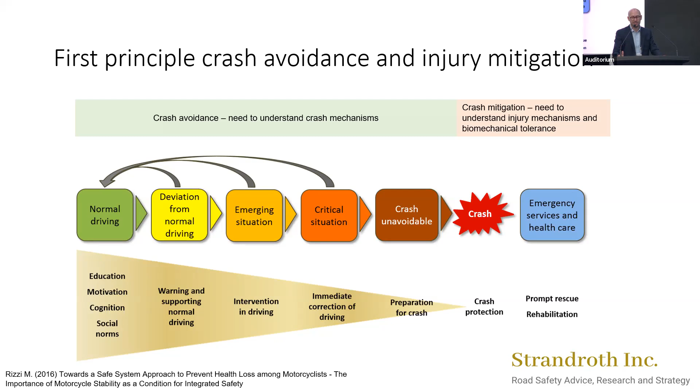Now with the safe system approach or Vision Zero, that started to change quite a bit, where we say that, yeah, the road user definitely has an important part in the safe system. But when it comes to the ultimate responsibility for crash mitigation principles and making sure the system is forgiving when people make mistakes, that's where we as system designers and infrastructure designers need to step in and make sure that system is forgiving.

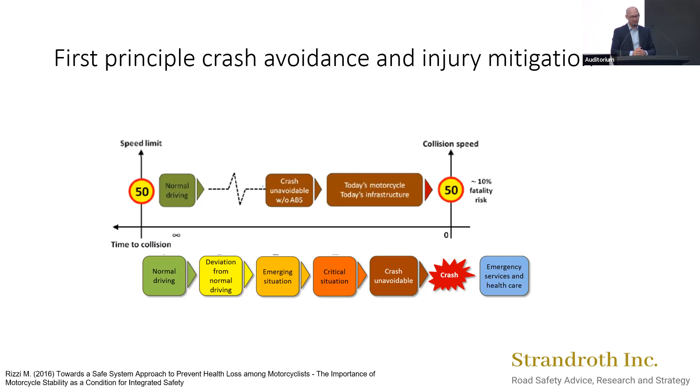The next thing is to look not only at crash mitigation but crash avoidance as well, and there are still question marks there because there's been a lack of understanding on how to work with crash avoidance for motorcycle safety regarding infrastructure and vehicles. But that's changing, and over at least the last decade there's been a lot of technology in development and some already implemented - ABS is a perfect example, acting in the crash avoidance phase, making sure instability in braking is avoided and thereby avoiding the crash.

What we want to know is what kind of impact this would have on fatalities and injuries. This is where we get into counterfactual analysis, a tool to help us understand the effect of different types of treatments, because that's really what we need to know.

If we're getting into a strategy development phase or an action plan and we want to do a set of measures for motorcyclists to improve safety, we want to understand: if I do this, what is the impact, what is the number of saved lives I can get from that, and the number of prevented serious injuries.

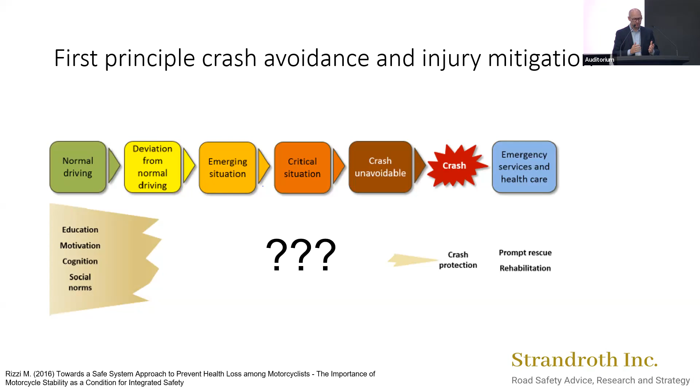So if we take the next slide, that was one of the examples that happened when I was part of authoring the first evaluation of ABS in Europe. And that's where we used counterfactual analysis to understand what a system or a treatment is actually targeting. What is it trying to do?

And if we look at ABS, for example, on the left-hand side of the previous slide—that one, thank you—the first thing is to understand what ABS does. Well, it acts under braking. So you start to make up a decision tree and look at all your fatalities and say, how many of these fatalities actually have braking involved? And if there's a no, of course, ABS would have no effect. But if there is braking, then ABS could potentially help.

And then you continue on that decision tree and make more advanced boundary conditions around a certain system. You end up, in this case, with the fact that two-thirds of all fatal crashes with motorcycles had braking involved, and also instability in braking, which means you get an idea of how huge the effect could be in a system like this. But that's only one example, and that spurred the hypothesis for a statistical study that then evaluated real-life benefit to be around 50% for severe and fatal injuries.

So that's only one system, but that could be done for several systems. If we take the next slide, we can see the result of that counterfactual analysis being done on several treatments in a country like Sweden.

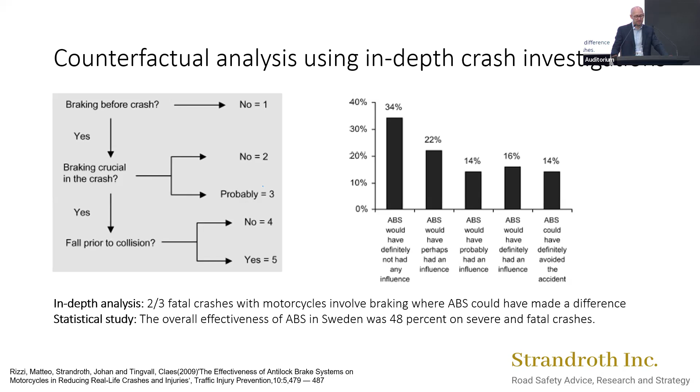So the blue bars here represent the number of saved lives for different types of vehicle safety measures. The green ones would be different types of infrastructure measures, and the yellow ones would be different types of road user behavior treatments or measures.

And it's not a full-blown evaluation where we wait 10 years for crash data and then see real-life benefits. What it is, is a what-if scenario to say: we know that there's a certain system that acts on this type of crashes. What if we would do something about that? What if we would introduce this treatment? How far would that take us? What's the individual benefit of doing things?

And that's an important tool when we try to prioritize and choose, in my country, what the specific benefits are. That's an important factor. This is Sweden, and this will, of course, be quite different in other parts of the world.

Now, the laws of physics are the same. We as humans, what we tolerate in biomechanical forces—that's the same. But the number of target population crashes differs from different regions of the world. And that's why this needs to be done and repeated in different parts of the world.

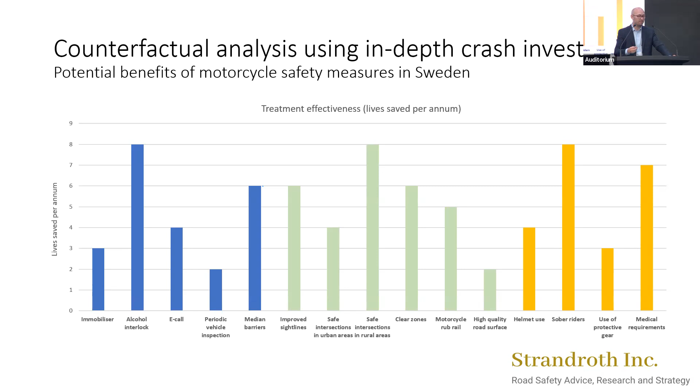Now, if you choose an action plan or a program, of course, you need to prioritize. So maybe the next step, if you take the next slide, is an example of how you choose some of those things to say: here are my most important key elements in my action plan to reduce a target, or to reduce the number of fatalities and injuries to a specific target.

And then I can calculate, through my analysis, the effect of that in terms of number of saved lives, and I can add that and account for double counting so that I actually get a combined effect of all this treatment from a holistic perspective—an understanding of how close that will take me to the target. So in that sense, it's a more holistic, strategic response to the whole problem, where I want to make sure I have different types of elements and different types of pillars in my response.

If I can provoke a bit, we probably want to be a bit more visionary than that. This is very important when we look at interim targets, with recommendations from OECD, WHO and others for targets to be ambitious but also empirically derived and reasonable, so I have an evidence base to achieve them. But if we look forward and ask how an end state would actually look - what does a system look like with no fatalities or injuries for motorcyclists, and do we have the tools today to get close to that? How would that look, and can I validate it with in-depth crash analysis?

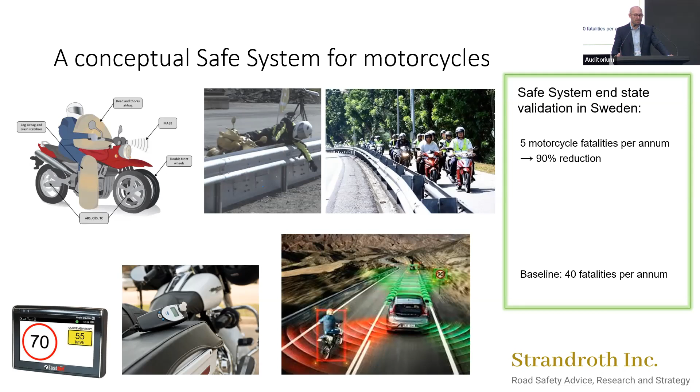Finally, I want to acknowledge that this differs in different parts of the world. This exercise isn't something you do in Sweden, Singapore, or Vietnam and then consider representative for the whole world. No, because we drive different motorcycles - and as mentioned by previous speakers yesterday, we have different types of motorcyclists, different road users. This means we need to do this type of analysis in the local context, to make sure the strategic response and the safe system concept are adapted to the mobility needs of powered two-wheelers in that specific region of the world.

So my final recommendation would be to develop evidence-based safe system end states for motorcyclists, taking regional mobility needs into account, validating that, and acknowledging the use and benefits of in-depth crash analysis during that process. Thank you very much.

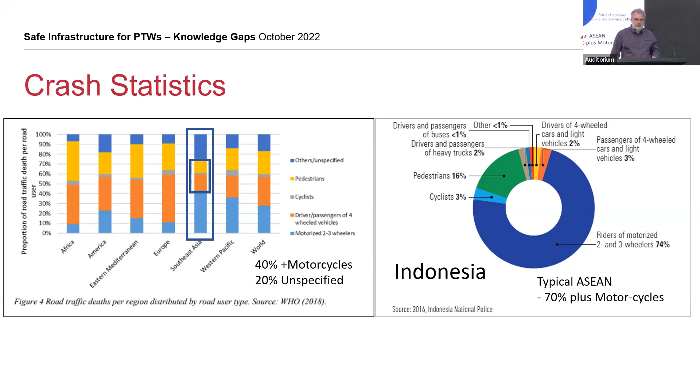We've already heard a lot over the last day about the fact that in Southeast Asia, motorcycle safety is a big issue. In Indonesia it's even a bigger issue, like a lot of other ASEAN countries, with about 75% of fatalities involving powered two-wheelers. So any design and improvements you need to make at black spots definitely need to look at these road users.

So I'm going to talk a bit today about the different infrastructure measures used to address crash black spots and powered two-wheeler safety issues. The first two, pavement quality and consistency and roadside barrier design, there's actually quite a lot of guidance and guidelines around, and I'd recommend the Transport for London guide in terms of what you should be looking at for poor pavement quality and how you should design barrier systems to be as safe as possible for powered two-wheelers. So I'm not going to talk a lot more about those two.

Now in Indonesia, the two key treatments they actually use to try and address these black spots currently are shoulder widening, or widening the road to better accommodate powered two-wheelers, and putting in median islands, particularly on 4+ lane roads. So I'll talk a bit about those.

A couple of measures they're not using as much as they could be - in terms of intersection facilities, they are actually trialling quite a lot currently in terms of advanced stop line bike boxes. But I'll talk about that and motorcycle lanes and the research around that. Then I'll finish off talking about speed management and how we can reduce speeds involving powered two-wheelers.

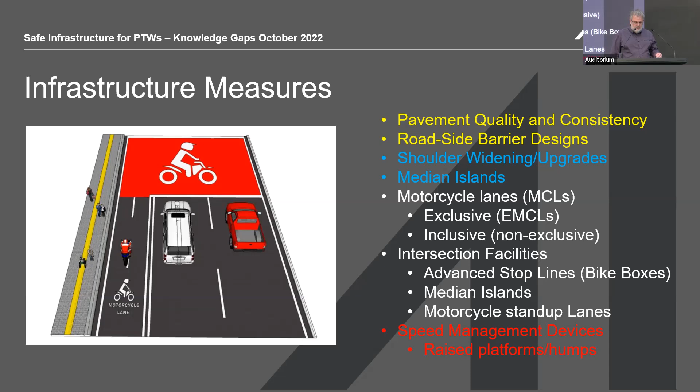Some of the issues are such that when drivers are trying to overtake these powered two-wheelers, they end up crossing the centre line, which can create a risk in terms of head-on crashes. And if a motorcyclist is overtaking, which they often are on these roads, the vehicle coming the other direction doesn't have a shoulder they can pull over to, to perhaps avoid a collision. It's particularly an issue on curves.

So a lot of the treatments we're looking at in Bali in particular are looking at how we can widen the road and create a bit more space. That's a fairly common treatment that has been used in the past in Indonesia to address black spots.

The other thing they're doing a lot of, particularly in Denpasar here in Bali, is putting in medians to reduce the amount of motorcyclists overtaking on these roads. There's all sorts of different median types they're using, and some of them are quite narrow because some of the roads are quite narrow, so to fit in a median. But the issue with these medians, of course, is the fact that you're stopping the right turns, but...

...the motorcyclists still need to access those properties. So one of the issues they haven't really looked at very carefully is U-turning slots and the ability for the U-turning of motorcycles on these very narrow medians. And it's even worse, obviously, for cars that have to U-turn - it's very difficult because there's just not the space with the narrow medians.

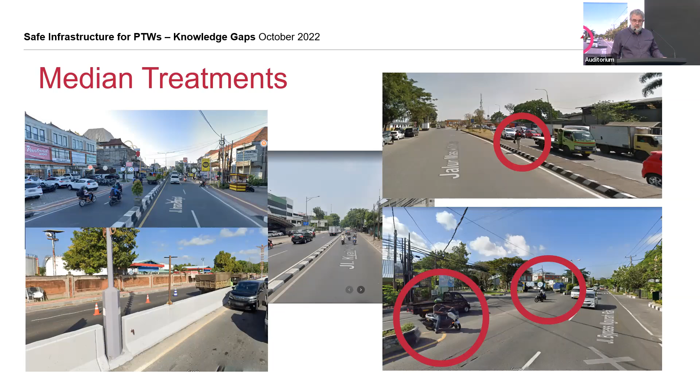Another area, not in widespread use in Indonesia but trialled in some places, is the use of motorcycle lanes. We do know from the research, particularly exclusive motorcycle lanes with very few accesses and intersections across them, that they can be quite effective. There are lots of different types of treatments, including full barrier type treatments, other separators that are not barrier type but still separate motorcyclists from general traffic, through to full separation along motorways and such like as you have in Malaysia.

And when these are fully exclusive, you can get quite good safety benefits. This is one area where we do have some quite good before and after research indicating that you can get up to a 40% reduction in motorcycle crashes. But generally, in a lot of these facilities, we don't have very good before and after information. So there is a lot of information in the literature, but not necessarily a lot about how effective these types of facilities are in different environments.

So where there are a few access ways and intersections, you can get those big benefits. Where there are a lot of access ways, a bit like bicycle lanes, which I'm more familiar with in New Zealand, we can end up with lots of crashes. In some cases, they can actually have more crashes than not having the facility, and it's because vehicles have to turn across these access ways to enter them and side roads. So that's an issue with these exclusive motorcycle lanes.

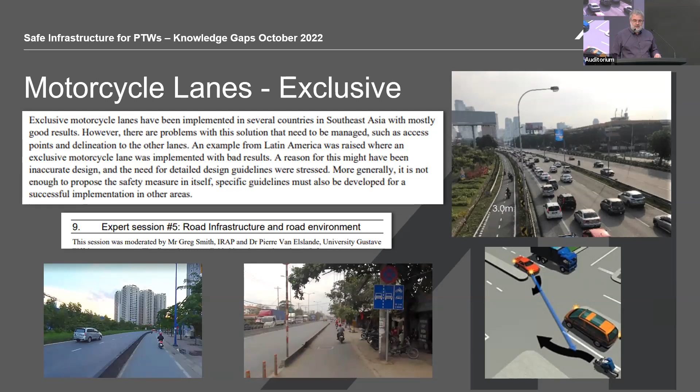So the other type of motorcycle lane are the inclusive lanes, which are more commonly used in Indonesia than the separated ones because their corridors are quite narrow and it's very difficult to accommodate separated motorcycle lanes. There is research indicating these facilities can reduce powered two-wheeler crashes, but there are also circumstances where, because of the number of access ways and vehicles impinging into those facilities to undertake or manoeuvre around others, they are not as safe as you'd want. This is where more research is needed on where to avoid using those facilities, since you might end up with more crashes. There need to be more before-and-after studies in different road environments.

The other issue with powered two-wheelers, interestingly from the research, is that the slower moving and the faster moving two-wheelers are the ones that tend to have the most crashes. That's what the literature indicates. Slow moving motorcyclists create risk because vehicles sometimes want to overtake them, and if there's not enough room or no good facility like a motorcycle lane or shoulder, they have to overtake often across the centre line, creating a head-on risk. The higher speed motorcyclists tend to have more crashes because they overtake a lot, since they're overtaking other vehicles on the road.

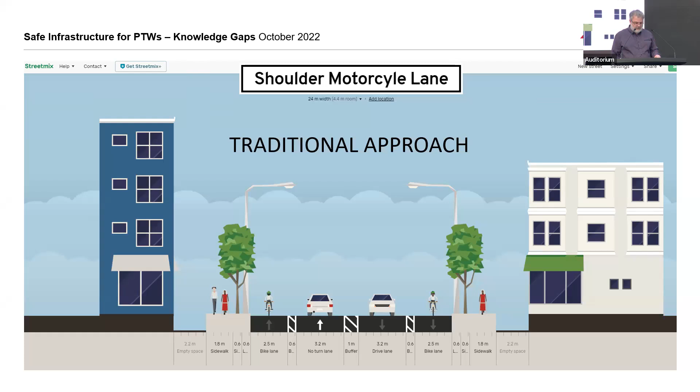So there may be cases where you need motorcycle lanes also in the centre for the faster moving vehicles. Interestingly, what came up yesterday was the idea that in locations with lots of motorcyclists, we should be thinking not about motorcycle lanes, but lanes for the other vehicles. This is that type of concept: you've got a lane where cars drive, with room either side for motorcyclists, both slow moving and fast moving, and motorcyclists also use the vehicle lane. But when you've got a lot of them, there's potentially a need to do this to reduce the risk of crashes involving the faster moving motorcycles. But obviously you need to put a median in to do that.

And you see this already in the behaviour of motorcyclists. Just looking here in the Philippines, some motorcyclists are actually lane splitting right next to the median in the middle of the road, and some are using the sometimes-bicycle lane next to the sidewalk. So where there are lots of them, I suggest this design should be looked at, but I haven't been able to find any examples of anyone who's tried this.

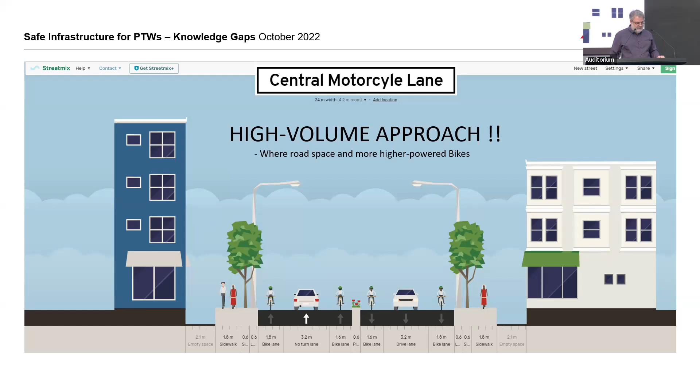The other issue is motorcyclists straddling the centre line, and in really busy intersections, stacking into the opposing lane, creating that head-on risk.

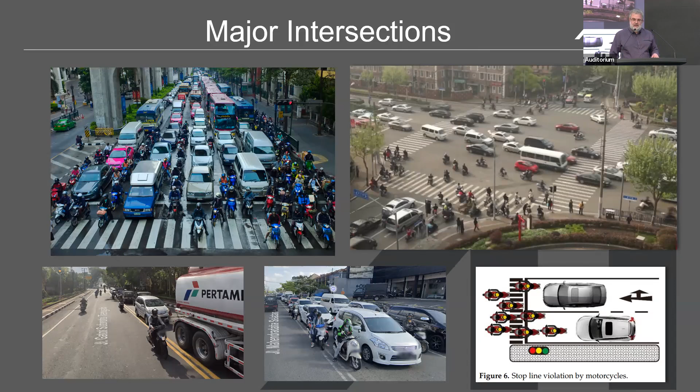In terms of the research, not in every situation but in many, the bike box has been shown to be effective in reducing the number of potential near misses or conflicts. So you'd read from that they're probably effective in reducing crashes, and that motorcycle lanes have some benefit in these situations.

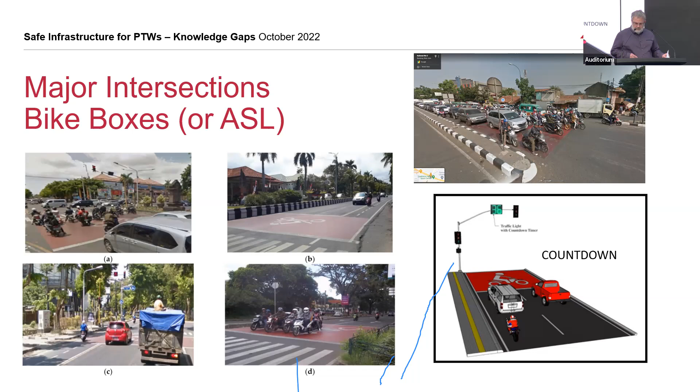That type of treatment is being evaluated, and while they didn't look at safety directly, they found use of countdown signals actually reduced the number of red light runners occurring at these intersections. That site is from Bali. Next slide, thanks.

In terms of speed management for powered two-wheelers, this is an area where we need a lot more research and understanding, because we know roundabouts are good for four-wheeled vehicles and can be safe for powered two-wheelers, but they have to be designed very well. If you design them wrong, they can create a lot of crashes.

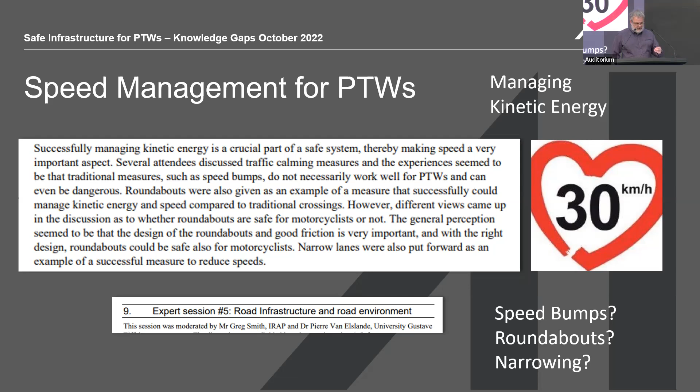With other facilities like speed bumps and narrowing, sometimes they're effective for powered two-wheelers, sometimes they can actually increase crashes, and in other cases they are beneficial. There's going to be a talk later about instances where they actually do increase crashes. But the key thing is we're trying to reduce speeds down to ideally below 30, which will reduce serious and fatal crashes, or as Johan said, at least below 50 kilometres an hour will reduce the number of deaths. But we still need to learn a lot more about how we manage powered two-wheelers through road design.

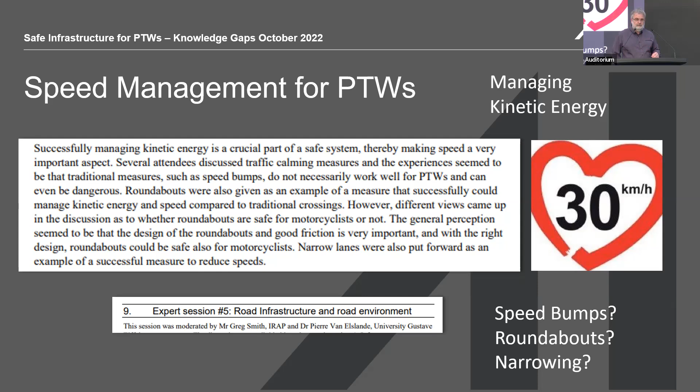One thing they've done in Indonesia is deal with a lot of trouble with roundabouts, so most have actually been signalised. Most of these we've looked at do have quite a lot of crashes, but not a lot of serious or fatal crashes. They tend to be of lower severity, and under a safe system we're okay with that as long as we don't have death and serious injury.

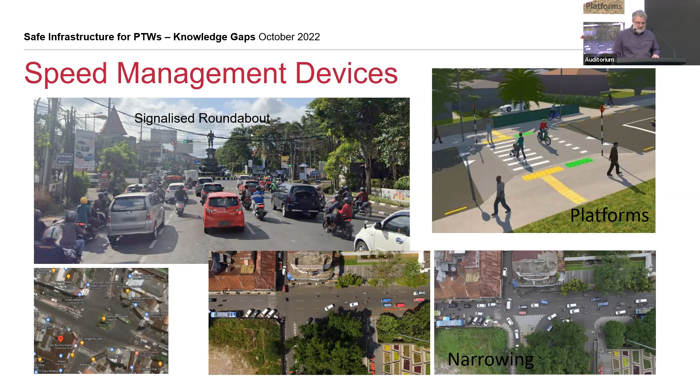We really don't know enough about platforms - where they're too steep, you can end up with more crashes; where too flat, maybe they're not effective in slowing down powered two-wheelers. So we need to understand more about platforms. And where there's narrowing of the road as part of the platforms, that localised narrowing can create a hazard for motorcyclists. So this is another area where we need to find out more and trial these treatments and look at their effectiveness. Next slide.

As I said early on, the limitation here is that we don't have a lot of before and after studies, crash studies of the effect of a lot of these treatments. We had them in some environments, but not in all road environments, and we need to do more evaluation. Doing evaluations of crashes does often require quite a few years of before and after data, and it's quite difficult if you're only trialling a few sites.

So what I recommend is that you look at doing traffic conflict studies using video analytics, where you can look at the number of near misses before and after you put the treatment in. If you're reducing the number of traffic conflicts or near misses, you're probably improving safety, and there's growing research that links those conflicts with crashes. With smart technology, being able to track vehicles and see how close they get in space and time, you can mount a video camera before and after and collect information about how many conflicts or near misses you got.

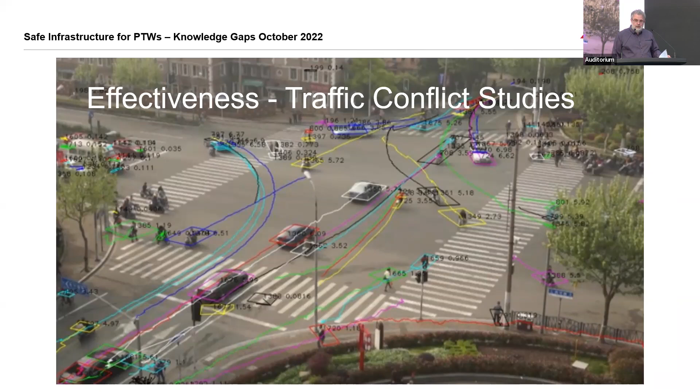So they're a very effective way of evaluating treatments, and something that Bina Marga in Indonesia is looking at doing potentially at their Bali black spot sites, looking at how effective the treatments are so that we can learn more about what treatments are most effective.

Using various smart technologies that are available, looking at this video analytical data, you can do heat maps of where a lot of the conflicts are occurring in your intersection or along your link, and that can tell you initially where your problems are, and then you can see afterward whether you've got a reduction in these near misses as a result of the treatment you've put in.

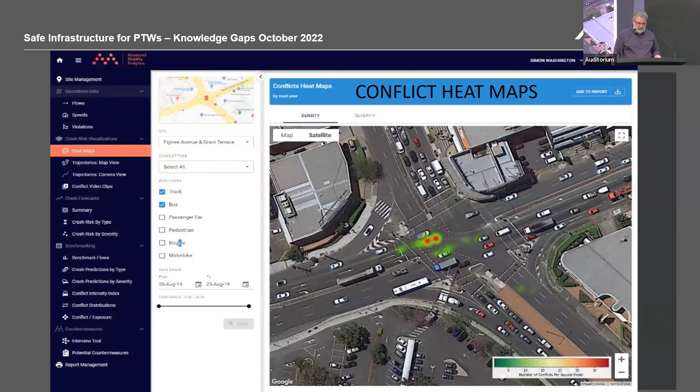But I think one thing that these current tools don't do—and there's a number of people who do this type of evaluation—is they don't separate the conflicts between two vehicles that can easily see each other and the conflicts that occur in blind spots. Obviously, what's of greater concern is where we've got near misses occurring where the truck driver or vehicle driver can't actually see the motorcyclist because it's a blind spot.

That's particularly where we want to see a reduction in the number of traffic conflicts, because in those circumstances, based on a whole lot of conflicts occurring every so often, a crash will actually occur. So that's what they need to develop in the technology, I think, to make the tools even more useful for us in understanding how effective the various treatments are. I think that's me finished. Thank you, everyone.

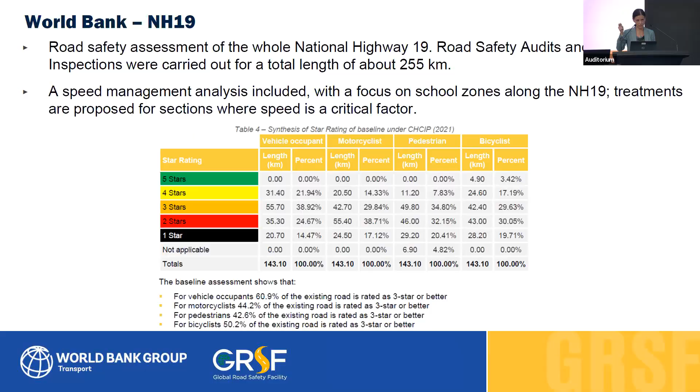If we go to the next slide, please. Here I'm going to do a quick stop just to share with you the importance of this multi-stakeholder engagement that I was talking to you about at the beginning, and the importance of doing a citizen survey.

And here I want to open a parenthesis, because all World Bank projects have a citizen engagement or community engagement survey and support. So all communities being benefited or affected in some way are always surveyed and involved in the project. However, the difference with this citizen engagement study that I will briefly tell you about is that it focuses only on road safety. And that's where the difference lies, okay?

And we found that it was amazing, because on one side it justified and gave us much more tools and strength for all the road safety activities we were doing in the project, but also shared that information with the actual users and community living and working around National Highway 19.

So for those of you who don't know much about Vietnam, you should know that Vietnam has more than 90% of road users being motorcyclists, and more than two-thirds of road crashes in Vietnam involve a motorcycle.

So the objectives of this study were to actually know the road safety knowledge, attitude, and behavior of motorcyclists living and/or working in these sections that we selected.

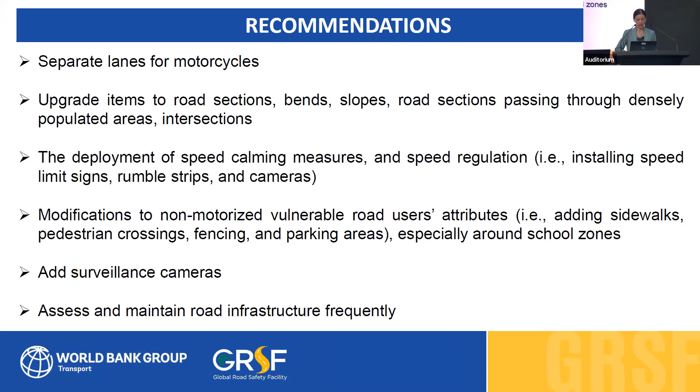Speed was a controversial area where some motorcyclists said they were willing to accept reduced speed, while others wanted better roads so they could arrive earlier to their daily needs. Still, most asked for deployment of speed calming measures and modifying attributes related to non-motorized vulnerable users. The good news is that many of these requests are included in the project.

One thing I forgot to mention is that although the assessments were carried out by the grant, the recommendations from those assessments are going to be carried out by the financing project. So that's where we have the link between the grants and the financing.

Now I'm going to focus on the other task under this project, which is upgrading from a safety perspective a design manual for exclusive roads and lanes. I mention roads and not only lanes because, as mentioned yesterday, when we have such a large amount of the fleet being motorcycles, we need to think also of exclusive roads, not only exclusive lanes. This manual is where I'm trying to make the link between theory and practice, and as Sean mentioned, the need for guidance within countries and leadership in actually making this evidence implemented in the real world.

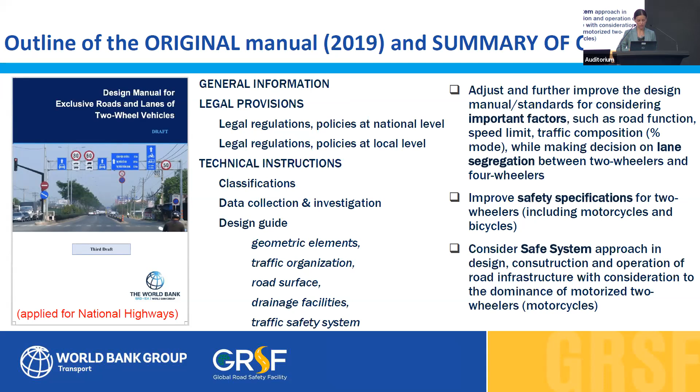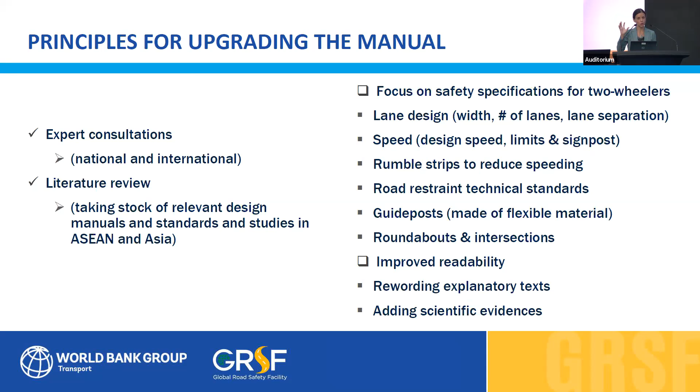Here is just a summary of the key points and improvements that were done. I didn't have time to go into detail on all of these points, but I still added them to the presentation. I'm going to try to just run through them, but I wanted to include them since you'll have access to the presentation in case you want to review it later.

Some of these key points and improvements cover traffic organization, the traffic safety system, how they can use the iRAP assessment to improve the actual infrastructure design and use, considering the guide but also once implemented, geometric design, classification of roads and lanes for two-wheelers, and sustainable transport development.

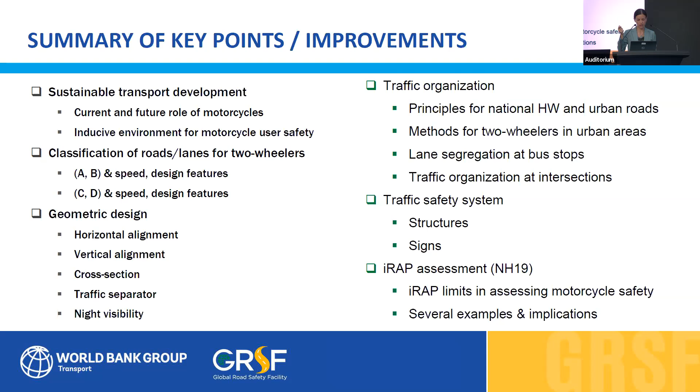It's important in this sustainable transport and motorcycle safety discussion to consider the context. In Vietnam, over the last decade, the number of motorcyclists has doubled, and the prognosis is that this trend will continue. We also know that in 2020 there were 670 motorcycles per 1,000 population compared to 44 automobiles, so you can really see the difference in the fleet. By 2030, it's looking like around 70% of the population will still prefer motorcycles as their daily travel.

Therefore, we also used what Vietnam already had, which is this four-pillar strategy for motorcycle safety, including policy and regulation, infrastructure—which is basically the how and the what—awareness, education and training, and technology advances. Now going into details, and again I'm just going to run through these slides...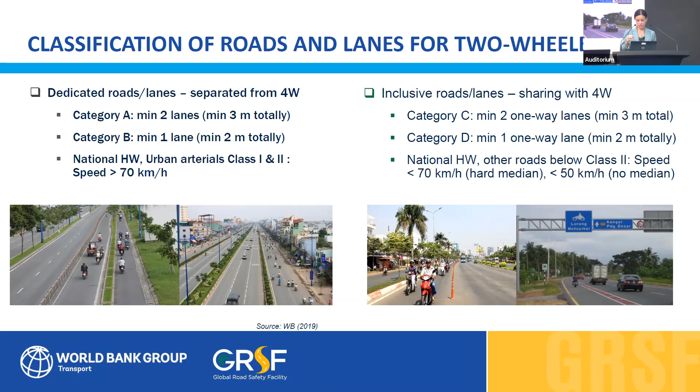We had to really go into detail on the classification of roads and lanes, considering the number of lanes, the speed, and the mixture of different vehicles, and then based on that classification, propose the right kind of measure for this motorcycle lane or exclusive road. So again, it was a very exhaustive review regarding classification, vehicle mixture and speed.

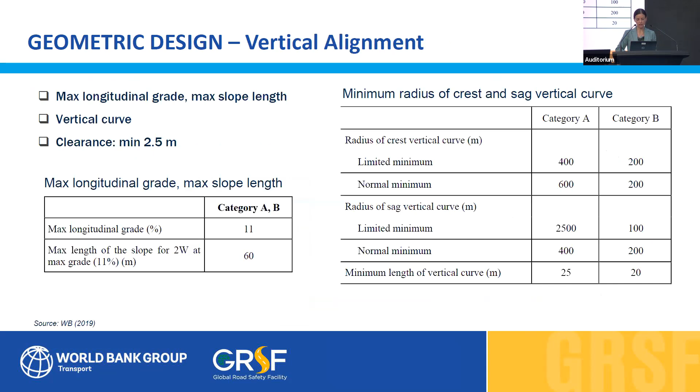Going to the geometric design, we went into horizontal alignment and vertical alignment, looking at best practices internationally but also locally, considering local conditions and reality. We went into the cross-section, considering the minimum width, the traffic volume, and the number of lanes, and what's the minimum required space for safe operation of two-wheelers.

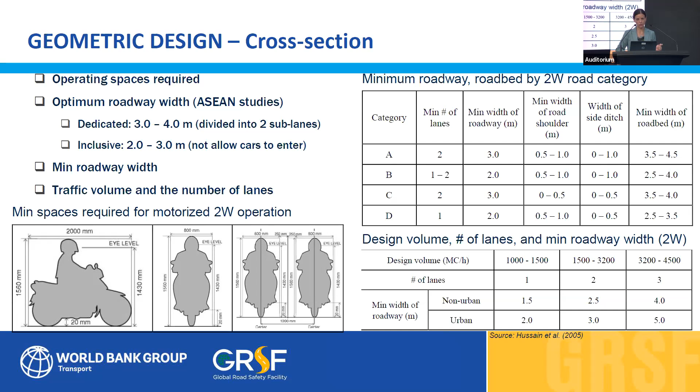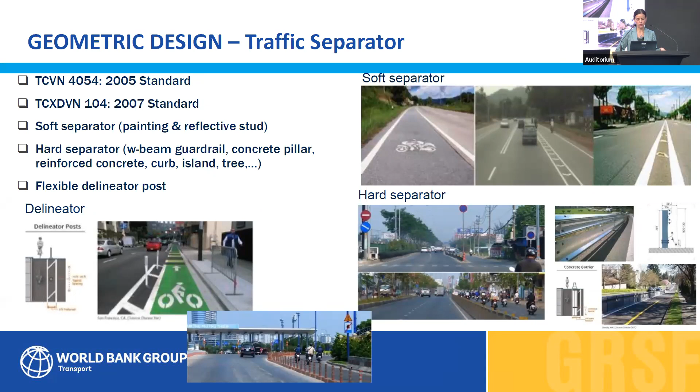For traffic separators, we went into detail on where it was safer to use a delineator, a soft separator, or a hard separator, based again on the classification of the roads and the mixture of different users. We also went into night visibility, which has already been mentioned as an important topic.

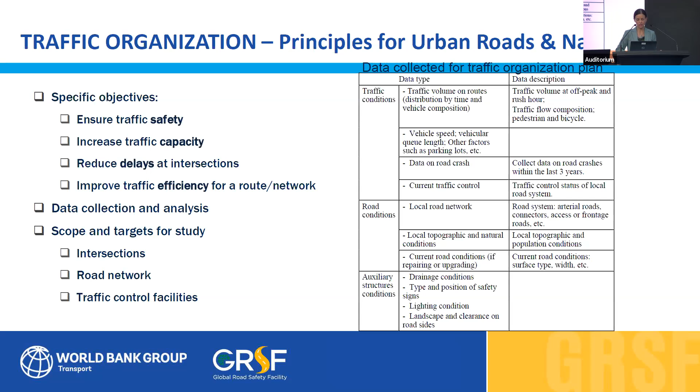We went into the principles of urban roads and national highways, because we know the risk is not the same—some national highways actually go through rural parts, and that was also considered. We also considered safety, capacity, delays at intersections, efficiency, and the data collection and analysis that was available.

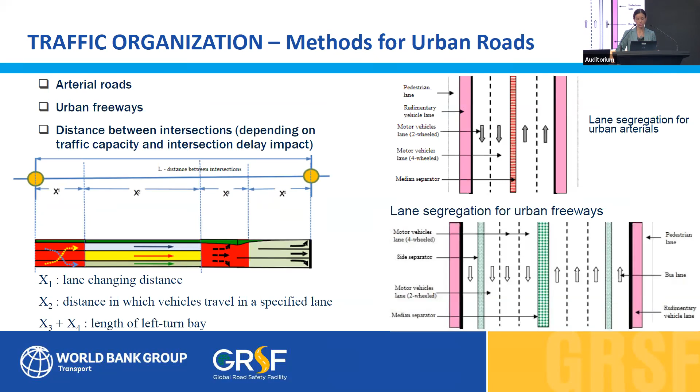And these are just highlighting some of the methods that are included in the guideline for urban roads, and also for national highways, as I was mentioning. As you can see here, there's a clear difference between the lane separation for two two-wheeler lanes and for three two-wheeler lanes.

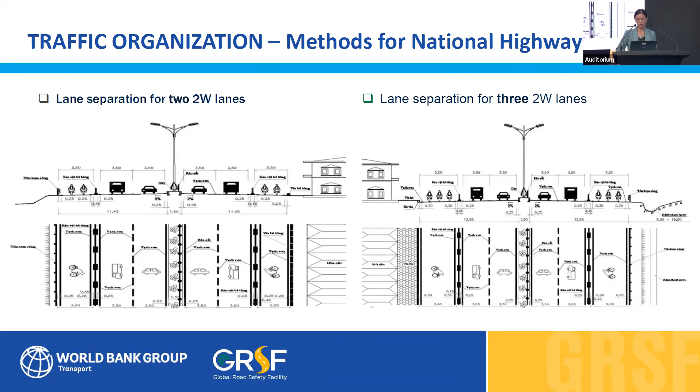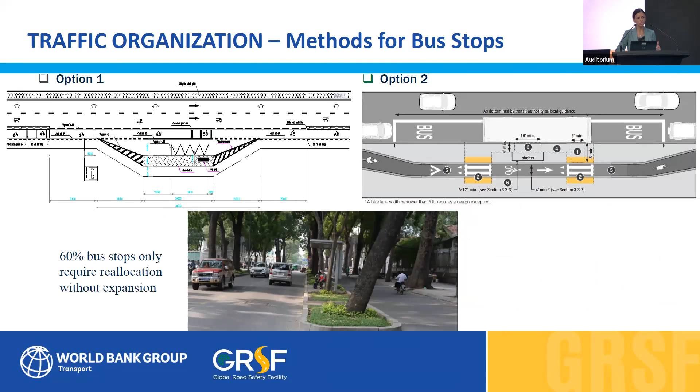Then we had also the methods for bus stops. The good news is that we found, at least using National Highway 19, that 60% of the bus stops only require reallocation without expansion. So that would actually support the implementation of these safety recommendations, as they will make them cheaper and easier to implement.

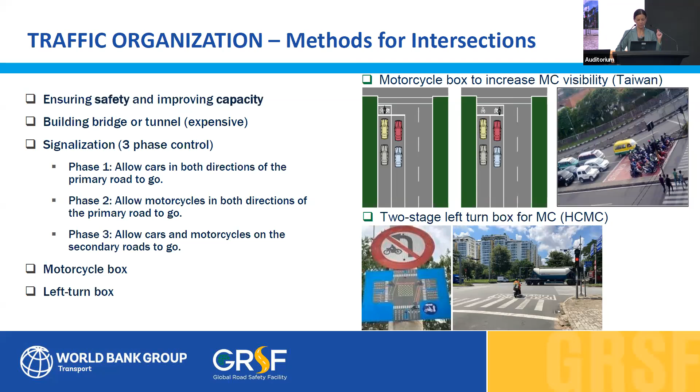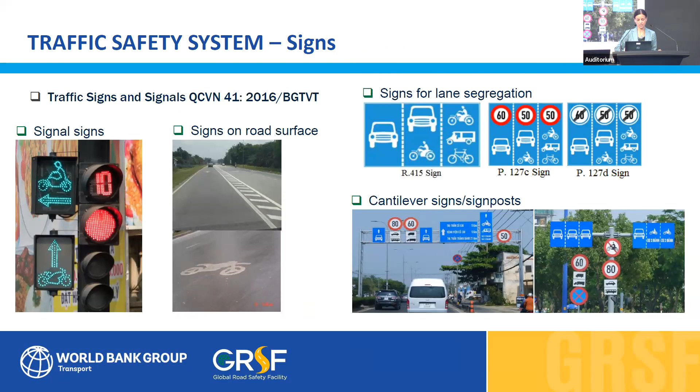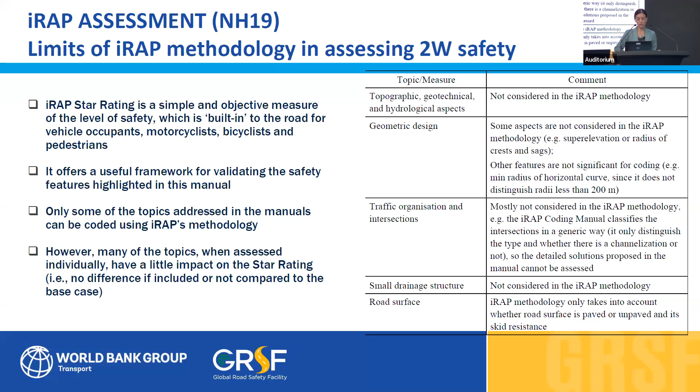We went into the methods for intersections, again looking into safety and capacity, the structures, and signs, the surface, the lane segregation, the different kinds of signs that need to be aligned, and what was more recommended for the type of lane and road. And the use of the iRAP methodology, considering some of the limits it may have, but also some of the improvements they already explained to us.

Here's another example, also looking into the soft separators and hard separators in a Class 2 Grade C motorcycle lane. Here you can see the difference between a grade-separated intersection, overpass or underpass, and an at-grade intersection that is 3-star or better.

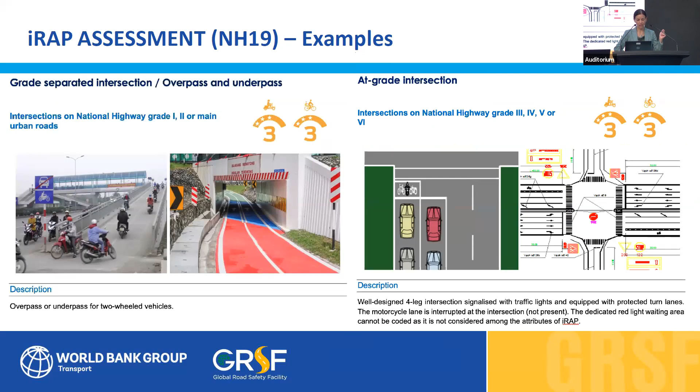And just concluding with the ways forward. I'm sorry I needed to rush through those slides, but I knew we didn't have time, but I still wanted you to know what's inside the guidelines. So this upgraded manual was done with the idea of really helping the Vietnam government to study, plan, design, audit, and implement these exclusive roads and lanes, not only from the efficiency part, but particularly on the safety aspects.

And I forgot to mention, when we were talking about two-wheelers, we're not only talking about motorized two-wheelers. Yes, motorized two-wheelers was the focus because of the large fleet, but we also considered bicycles. I must say this guideline is actually being supported or complemented by another guideline specific for bicycles that was developed with the support of WRI. So although this goes into little detail on two-wheelers in general and focuses on motorized two-wheelers, it's complemented by that other guide.

So these solutions are recommended throughout the guideline to be piloted, assessed, and adjusted as the manual or guideline is rolled out progressively. And again, it's important to consider how the iRAP methodology can be adapted and used in this context. Greg already gave us an overview of that. And the news is that this upgraded manual is already in the hands of the Vietnam authorities, in Vietnamese and in English, and they're currently reviewing it.

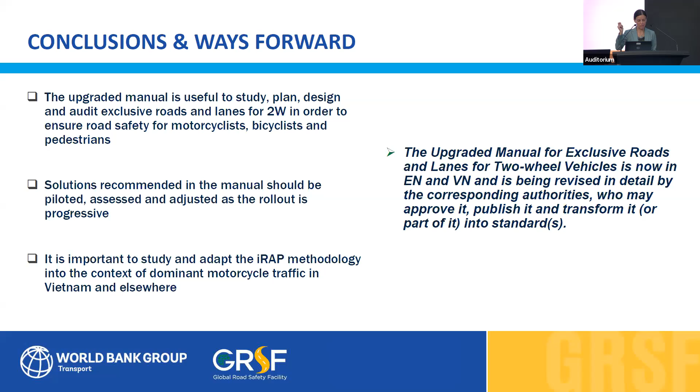And we're hoping that they will soon approve it, publish it, and hopefully the whole manual or parts of it will become a standard for the Vietnamese government. So that's how we go from theory to practice to action, and we are very excited about this. Now we are in the last stretch where we need to see that action happening.

If we go to the next slide, I'm just finishing with upcoming opportunities for Vietnam, just to share with you that there are a couple more projects coming: one on 3 national highways, another in the Mekong area, and another 5 national highways in the central and north area.

The idea of these projects is to also include, based on the activities and experience from the project I briefly presented, the opportunity to include in these new 2 projects the same work—working along with the provinces involved in these joint actions and considering motorcyclist safety, all vulnerable users, speed management, road hazards, and safe intersections.

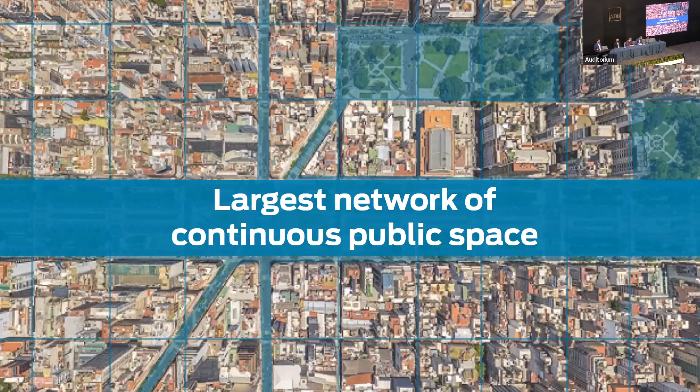When we think about these streets that form our largest network of continuous public spaces in our cities, we must make better use of this valuable space.

For many years, we have been considering only one user in isolation when we make those design decisions, applying highway codes to urban streets. All the priority has been given to make those environments more convenient and attractive for people inside a car, but designing out everyone else.

Any considerations for other vulnerable road users came as an afterthought. So if you're someone taking transit on a street, riding a motorbike, a bicycle, or even doing simple daily things like crossing a street or taking the kids to school, those activities became a death threat.

So of course we're here today to discuss the implications of the increase in motorcycling use and the rise in fatalities and injuries in our cities.

There's a lot that can be done, as we're discussing in this session, but I wanted to focus on the fact that when we talk about infrastructure or street design, we should acknowledge that the street is a single, unique space where multiple users interact.

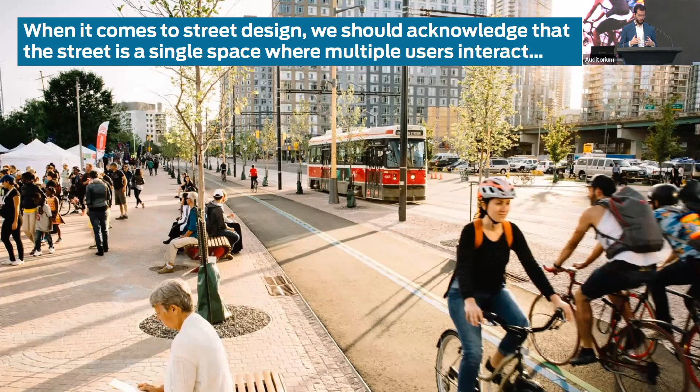When we address street design and infrastructure, we now have the opportunity to avoid repeating mistakes from the past, of considering only one user in isolation, instead considering all users and how we make our cities safe for all of them.

At the Global Designing Cities Initiative, for those unfamiliar, we're a nonprofit organization based in New York City. When our program launched, our first mission under the Bloomberg Initiative for Global Road Safety was to develop a global street design guide based on guidelines from NACTO in the US, adapted to a global context, learning from the expertise of on-the-ground practitioners from different regions of the world, with the basic premise of inverting priorities in infrastructure investments and putting people first in street design.

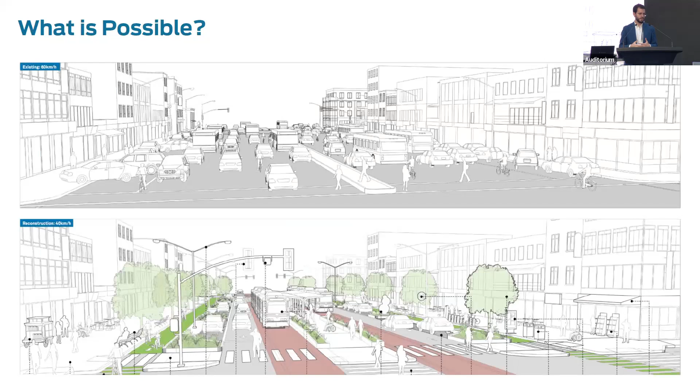The guide also brings very ambitious yet practical examples of how we can transform our existing streets to become safer, more sustainable, more resilient, and ultimately better places for our city dwellers.

The guide also brings guidelines for each of the six road users that are defined, thinking about them in integration, right?

As many here today know, the safety of powered two-wheelers or motorcyclists is a new topic of research, and we are far from having all the responses here, but we are excited to dialogue and try to formulate at least the right questions and how we should go about it. So what is specific about motorcyclists?

Of course they are highly vulnerable, as we've been discussing, but they are kind of a unique vulnerable road user, as they are at the same time at high risk themselves but also pose risks to others. When we think about the lack of physical protection, of course they are very exposed and vulnerable.

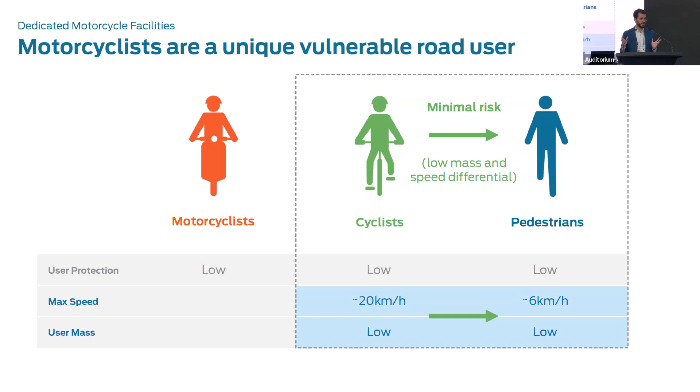But when you think about interaction between vulnerable road users, cyclists and pedestrians, because of the low mass and speed differential, they pose minimal risk to each other. But motorcyclists have medium mass and can reach high speeds, so they pose a risk also to other vulnerable road users.

And this is important for infrastructure. Just to illustrate that, in the city of Bogota in Colombia, motorcycles are the leading cause of death for pedestrians.

They cause one-third of every pedestrian fatality in the city. They're involved in causing or participating in 27% of all road traffic fatalities, despite a mode share of only 5.5% of all the trips.

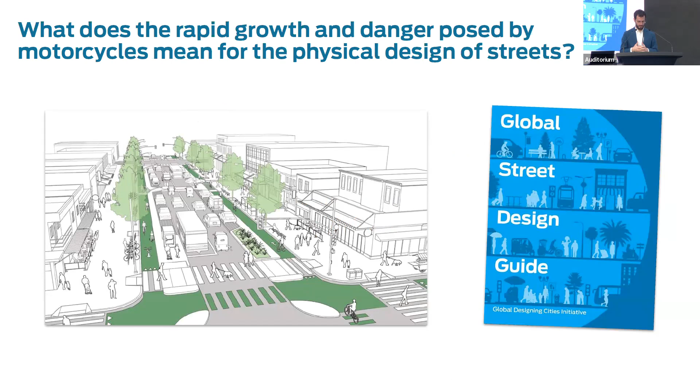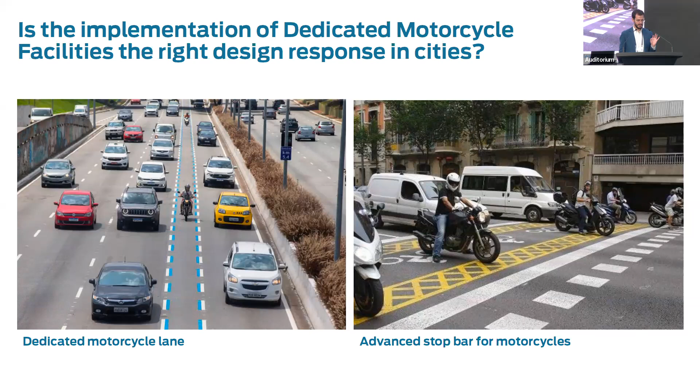So in cities at high speeds, motorcycling is inherently unsafe in urban areas in the model we have today. So what does the rapid growth and danger posed by motorcycles mean for the physical design of streets? How can we discuss what are the measures that we need to take for the future to address the current challenges? But also when we think about the lifespan of infrastructure investments, we have to think 15 years from now, 20 years from now, what is the future we are envisioning with these decisions? And then, of course, discuss very specifically if the implementation of dedicated motorcycle facilities is the right design response in cities. So I'm proposing three main ideas here that I will discuss.

Starting with the first one: are motorcycling facilities proven to make our streets safe for all users? We are seeing, very in line with what Shane presented, mixed results. In motorways there are positive trends, but when it comes to cities, we see mixed results.

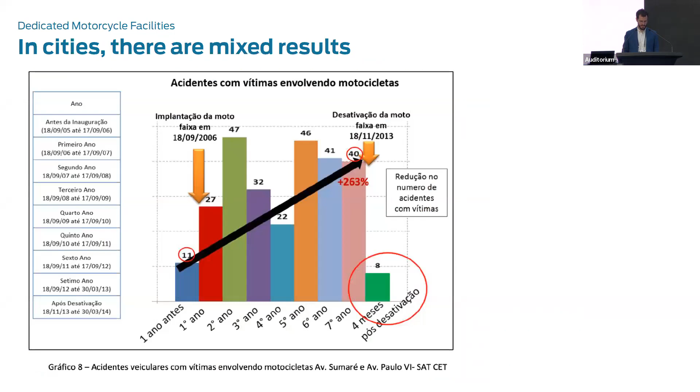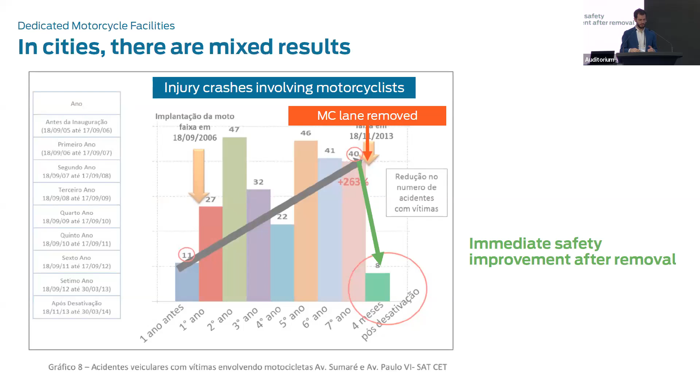This example from São Paulo in Brazil, where a motorcycle lane was implemented, the safety outcomes were actually very negative. There was a high increase in injury crashes. And after seven years trying to fix and adapt the trial, the city decided to remove it. When they removed it, the crash rates returned to the original state. And also the results for pedestrians were really bad, with a very sharp increase in the number of pedestrian crashes.

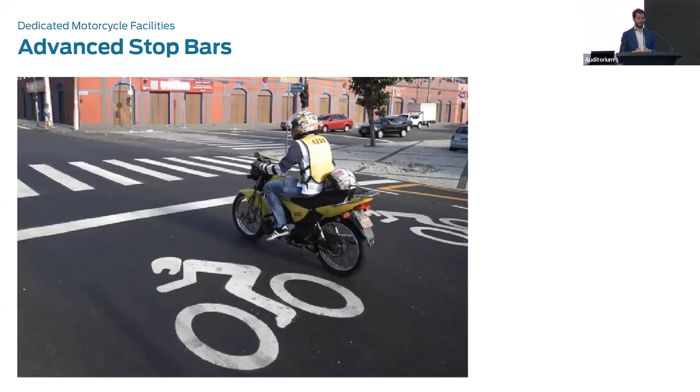Advanced stop bars, we also see mixed results. This is a citywide evaluation in the city of Fortaleza in Brazil. There has been a significant and important reduction in injury crashes, but at the same time, a concerning increase in pedestrian crashes. So how do we evaluate these infrastructures, taking into consideration the safety of all road users, not just motorcyclists in isolation?

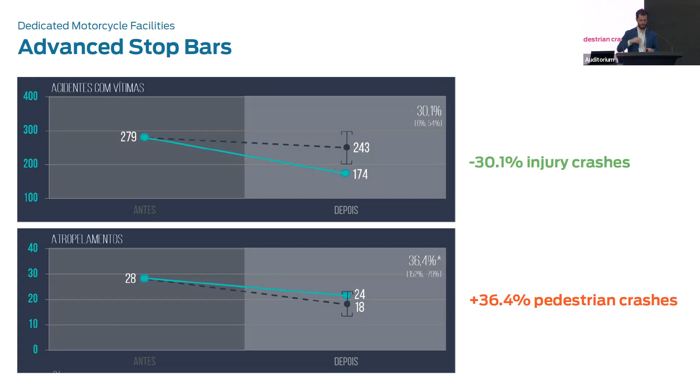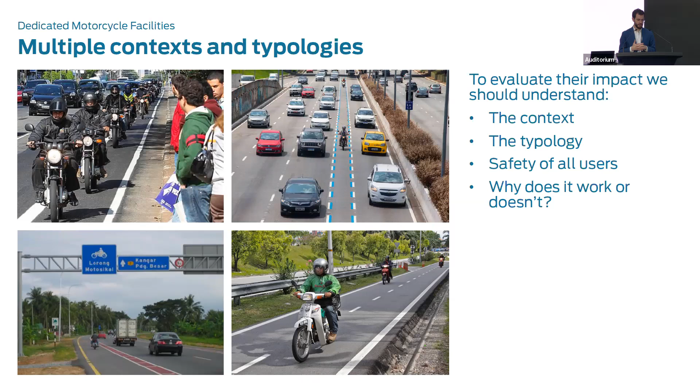So we have to look at these facilities, first taking into consideration what is the context they are implemented in - are they inside the city, or in exurban areas. What are the typologies? Is it a center-running lane, fully protected and physically separated? Or is it more mixed with traffic? And how do we evaluate the safety of all users, and then understand why it's working or why it's not?

Also, a common discussion that appears very frequently and tends to be very anecdotal - we should try to look at the evidence for this - is: are wider lane widths better for motorcyclists? One argument is that it's easier to filter through traffic, but at the same time, can narrow lanes also limit speeding opportunities? What is the trade-off? What is the safety outcome of that?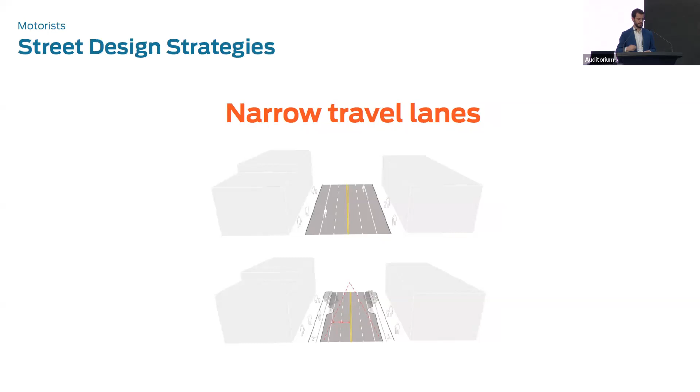For everything else, we do recommend narrow travel lanes in cities. Wide travel lanes are associated with higher speeds of traffic and higher crash rates and fatality rates. So what is the impact? One research question that I think is open for further investigation is: what is the impact of lane width on motorcyclist speed and safety? And how does it impact safety for all street users, not only motorcyclists?

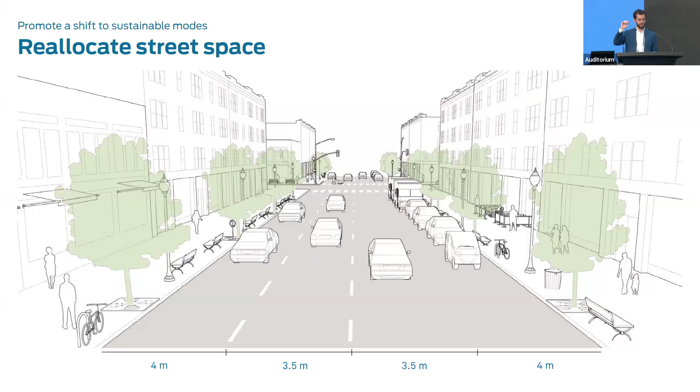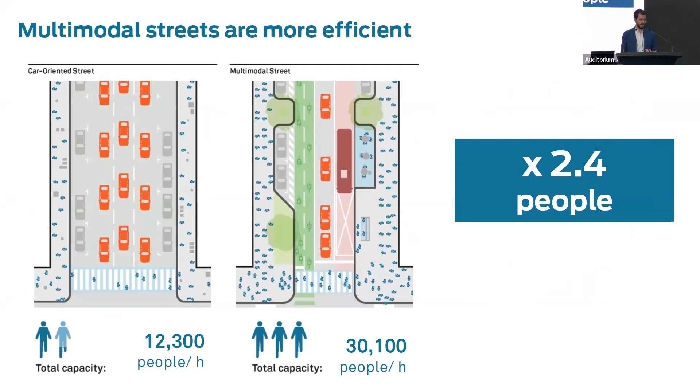The second point is about how are we using this space. What are the decisions that we are making? The street space is a finite resource. What should we be prioritizing to promote safe and sustainable mobility? We can do a lot by reallocating street space to make safe alternatives to driving and riding motorcycles convenient and more attractive, to bring more users and promote a mode shift. This is also a more efficient way to handle mobility and will have a positive impact in reducing congestion.

So how can we reverse this trend? One of the questions related to that: we are seeing a lot of motorcyclists coming from transit. This study in Pune, India, is showing that two-thirds of recent motorcyclists were previously using transit, the most efficient and safe mode that we have. So we have to do something to prevent this migration.

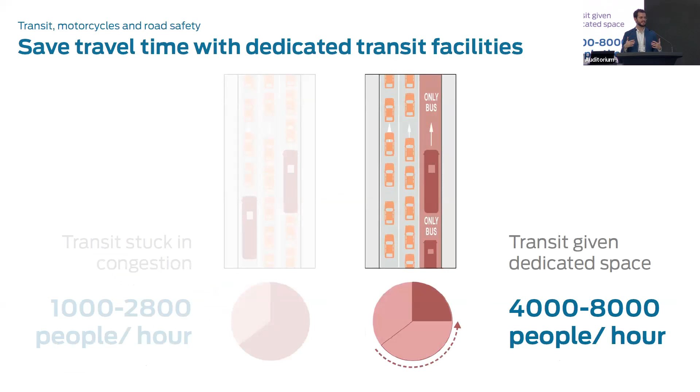One infrastructure response that will improve safety for motorcyclists is to dedicate space for transit, creating bus lanes that reduce drastically travel time and also increase the capacity of our streets. So there are lots of different typologies that we can implement, from the simplest bus lanes to BRTs.

But it's really important that we promote a shift to transit. Another frequent question we're asked is why should we not treat cycle and motorcycle facilities equally? We believe we shouldn't, because we're talking about one sustainable mode and one unsafe, unsustainable mode, so they have different places in the street hierarchy.

When we think about promoting safe cycling facilities, the goal is to attract more people to use a mode that is safer, more sustainable, and brings multiple public health and livability benefits to our cities. Evidence shows that the more cycle lanes, the more cyclists will ride, and the overall risk will be low. The more cycling, the fewer fatalities we have.

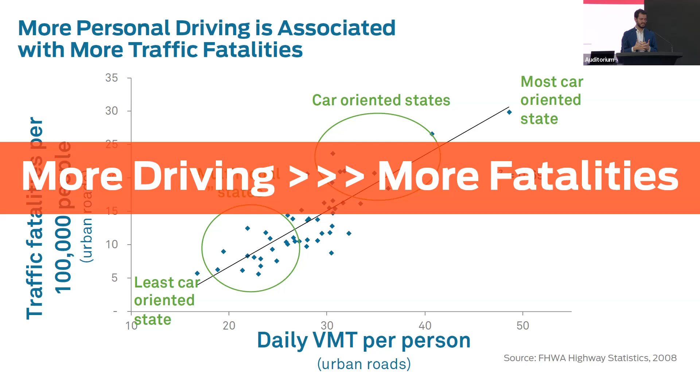We see the opposite trend for driving: the more vehicle kilometers traveled in a city, the more fatalities we have. So what does dedicated infrastructure for motorcycles do in this case? Does it induce a larger use of motorcycles in the city? Does it induce demand? And are higher percentages of motorcycle use or VKT also correlated with higher fatality rates for motorcyclists? Intuitively it seems yes, it will lead to an increase, but it's also an open research question.

Responding a bit to the thought-provoking questions Nam asked in his presentation: how can we capture the benefits of motorcycles but avoid their negative impacts? How can we embrace the current situation and think of an adaptation and evolution of the fleet toward one that has the same benefits of individual, point-to-point mobility, but with the same reach in terms of distance and comfort for the user?

We could think about promoting a shift from motorcycling to bicycles, of course, but also to electric bikes, why not? But it's really important that we define well the maximum mass those vehicles should have, and the maximum speed, so they can share space with cyclists. We don't know exactly what it will look like, but the important thing is to get the mass, the speed, and the kinetic energy right.

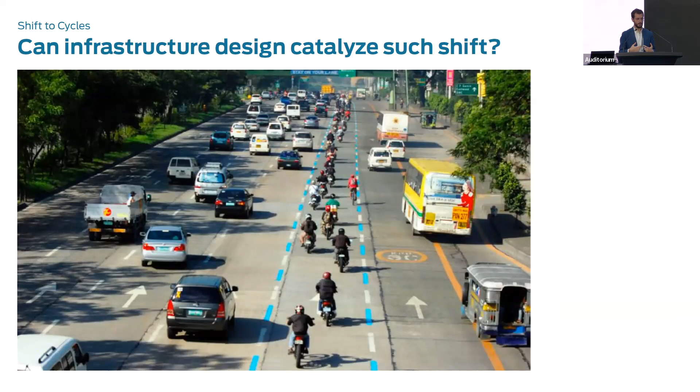Instead of making investments in infrastructure that may perpetuate an unsustainable mobility system and pattern, why don't we use infrastructure to catalyze a change and a shift to safer and more sustainable modes? Why don't we create prime, very well protected, attractive space for the uses we want to see more of in the future, addressing people's mobility needs instead of perpetuating and incentivizing unsafe modes?

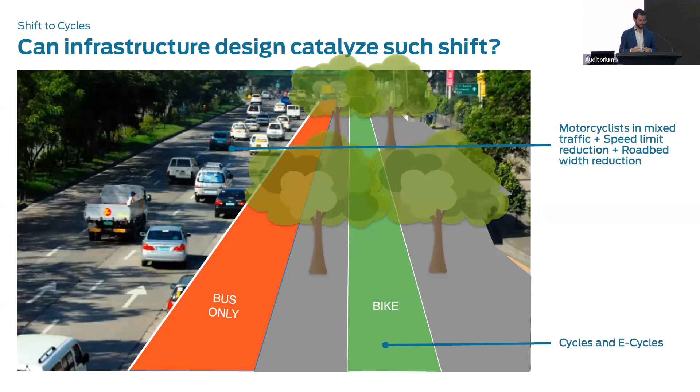So, last but definitely not least: I know this is all looking at the future, but looking at the present, what can we do right now? We know what is effective in terms of infrastructure, which is focusing on speeds to make our streets safer for all users. We know speed kills, and that lowering speed saves lives.

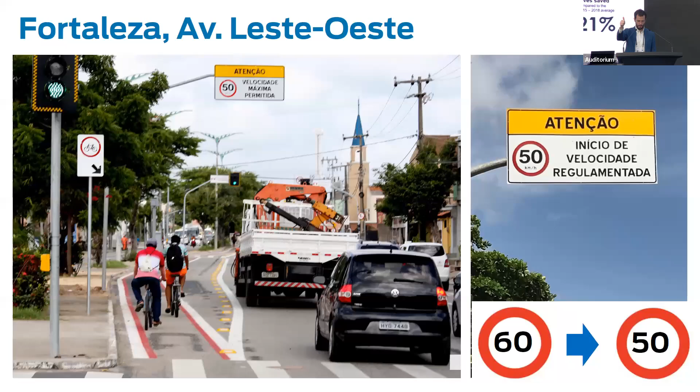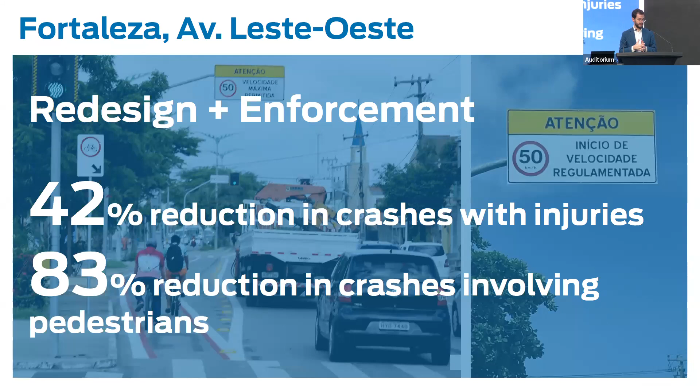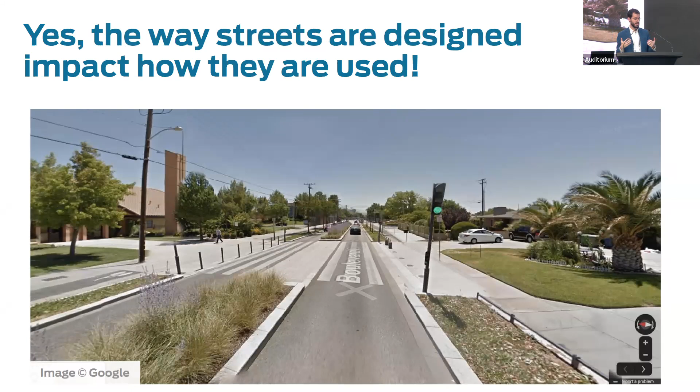We have evidence from all over the world showing the effectiveness of reducing speed limits combined with redesigning streets, prioritizing sustainable mobility, and automated enforcement. Those have the most significant results in terms of saving lives and preventing injuries. Of course, we can also do a lot with street design. The way our environment is designed will shape our behaviors and lead to safer speeds from motorized vehicles.

The Global Street Design Guide brings a lot of techniques and strategies to lower speed for all vehicles. And what we're seeing as evidence is that the overall speed of traffic is one of the main predictors of higher or lower crash rates for motorcyclists as well.

So, just summarizing: number one, focus on speeds for all the goals that we have. Reducing the overall speed of traffic will directly improve the safety of motorcyclists and all other users, but consider them together, don't consider only motorcyclists in isolation. We have to evaluate the impact of the decisions we make on infrastructure and street design for all users. And finally, let's promote a shift to safer modes and keep this in the vision of what we are promoting.

The street space is finite, and we need to use it wisely to promote a shift from motorcycling to safe and sustainable mobility. I just wanted to conclude by zooming out a little and noting that while we talk a lot about transportation and mobility, and it's really important to promote more cycling and walking, this is part of larger goals in terms of urban development and the livability of our cities. We have the tools to look at our cities differently and reimagine the role that streets play and how they will benefit our communities.

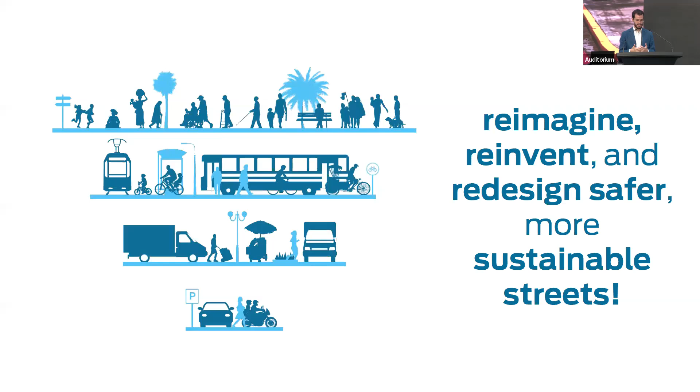How can we come together with communities and rethink and reimagine those streets, thinking of the future and of safer, more sustainable cities? Thank you very much.